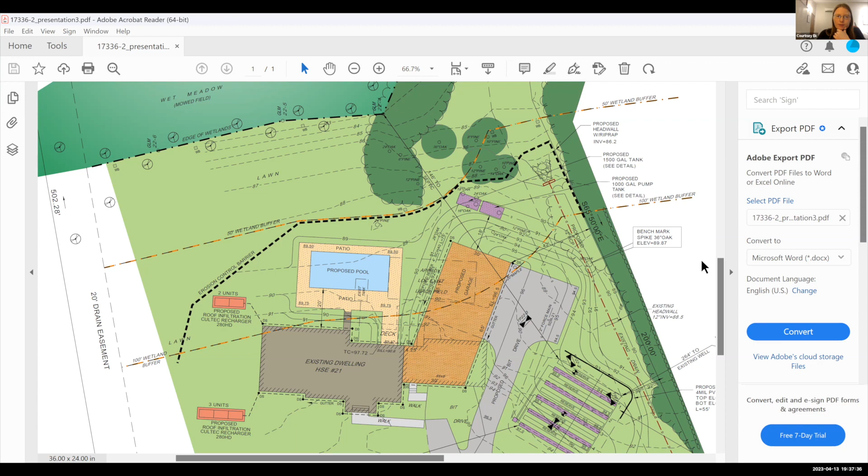And they can work out how to parcel that up. Can I ask one more question about that drainage easement area? So past the riprap, the easement continues into the 50-foot. Do you know if there's any kind of maintenance that needs to happen there, or do they need to prevent woody species from growing up, or does it not matter?

I think typically with an easement, the town would have the right to come in and clear enough so that it doesn't impede the flow. Okay, and that's why, like I was mentioning earlier, I'm a little leery about putting plantings there - right, get too large and impede the flow and have the town come in or somebody come in and cut them all down.

Oh, here, Sean must know that we're talking about him. Here, he's coming on now, so.

I just wasn't sure if we needed to make any accommodations for mowing in that area, but I think the town automatically has it.

Hey, Sean, can you hear us? You there, Sean? Yeah, that was quick. I just got here, sorry, I was trying to go to a fire, but then I didn't go.

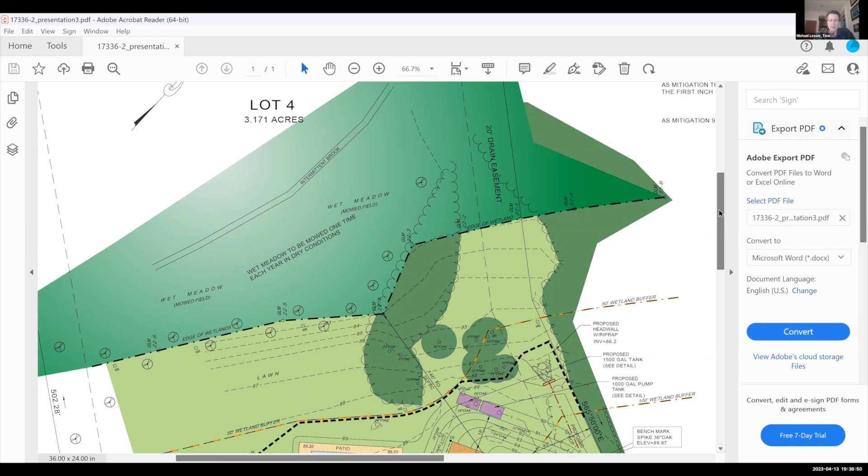We'll just fill you in. In the end, we're going to condition the project so that any construction work done on that drainage pipe, whether checking it out, repairing it, or adding to it, requires that before any work begins, there's agreement with you as to the plan of what to do. Then the next step would be that you can oversee any of the work on that. So it's sort of two parts. Does that seem to cover everything you need?

It does. And the as-built for the project will serve as my as-built for that pipe, as me and Rob had discussed, right? Yep. So we're basically done with that part of the project, with that kind of conditioning, and I think we've cleared up what's going to be managed and unmanaged in that area.

Going to the landscaping part on the other side, we're getting a nice mitigation by letting that wet meadow be mowed once around there, and it's demarcated by the trees, which I think is quite reasonable. I guess the circled things there are the new trees, but I can't tell how many there are.

2, 3, 4, 6... those are all new. 15 trees, I think, because we normally put the number. Yeah, 15 trees.

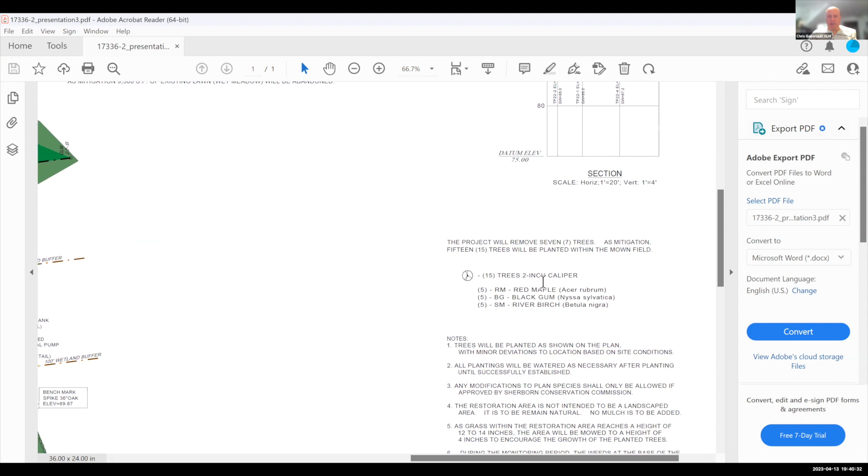Do we care about the trees that are further in? Oh, there's the planting schedule with the trees. Okay, what do people think about that choice? Anybody have any comment? It's fine, the choice is good.

Okay, good. Scroll back there. I'm just looking at the 3 trees sort of at the top, which I guess is what the applicant would prefer. I'm trying to think about the 3 trees on the right end too, whether they're right next to existing trees and whether they add very much, or whether they'd be better served somewhere else. I can't picture the place well enough to know whether those trees add something, since I see the existing tree canopy marked.

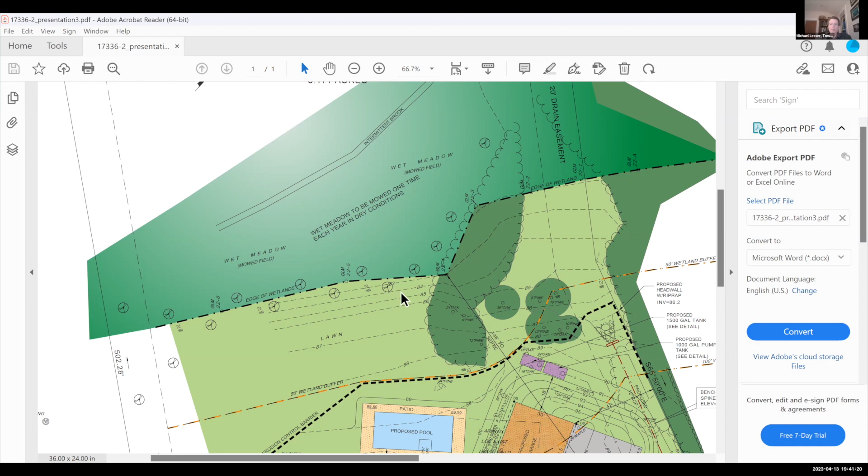I believe that existing canopy is shrubby rather than tree. Okay, I would just leave the trees as is. Okay, fine.

The mowing thing is - do we care about timing in the dry season? Do we care about the time of year, whether we worry about what birds and other wildlife go there?

Well, on our own conservation lands, we usually mow in October and November, so that you're basically brushing everything back without hurting the pollinators or anything like that. So November might be a good one.

I think that might be a little late in the dry season - whether we want to do it September 15th or October 1st. No, the point is to do it late in the season. Yeah, you want to be late, just trying to knock down the woody material.

But this is becoming harder and harder because the ground doesn't freeze very reliably. So do we want to ask for a November 1st or October 15th date, to give them flexibility as well as protect things? Do we need to specify a date, or can we just say late fall or winter, when the ground is frozen, so they don't damage the meadow?

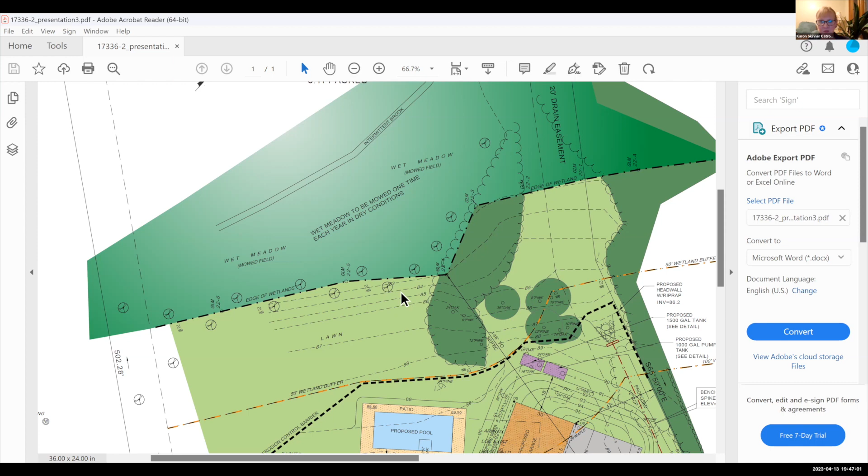Can you share the screen? I'll look at the app. Okay Chris, why don't you stop sharing, let me stop mine, and let me just bring up what I'm looking at in the application summary. Oh, I have that here, and I'm going to share that for everybody.

But I guess it shouldn't be a problem to sort of tell them not to manage along the boulders along the bank, except for invasives removal, if they want to do that. But are there boulders all the way along it, or is that just... I don't know, it looks a little different. Why don't we just say there's a 10-foot buffer?

Unless Chris would feel it would be a problematic thing to close our hearing and move forward with the idea of basically keeping a few feet off of the boulders, or a 10-foot border that's left to go natural except for invasives management.

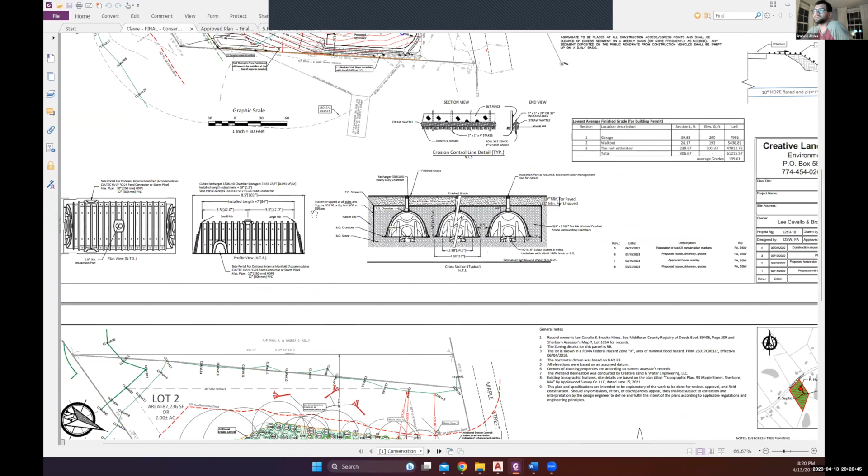And then we increased our impervious area by 28 square feet into the buffer. So on this next page here, we can see the overlap. The orange is the approved building envelope, and the purple is how we're proposing it right now. So the approved plan, we had that the disturbance in the buffer with impervious was going to be 660 square feet. That includes the house and the walkway and landing going up to the house.

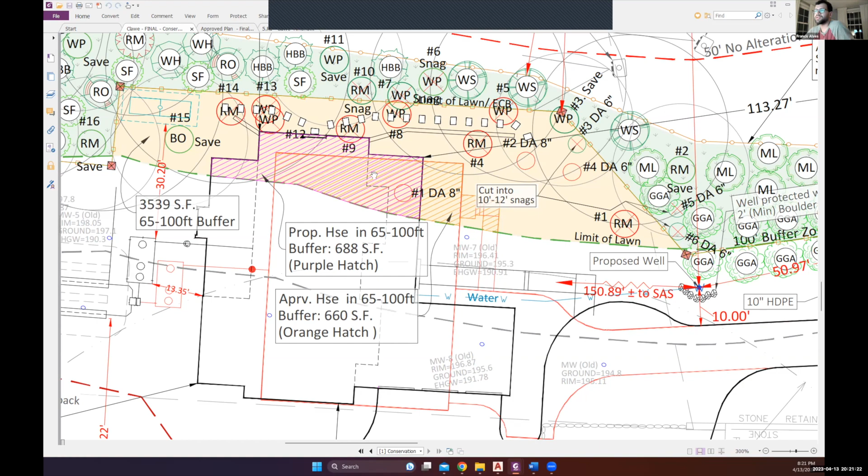And now with our current design, we have that our walkway is going to come towards the middle of the house. There's going to be no walkway here in the buffer, and it's going to be only house and then a walkout for the walkout basement. And we're going to put flagstones, field stones down, and create a path up to the backyard and up to the front yard.

And then we're proposing that this whole area, we're going to plant low maintenance, low growth vegetation such as ground cedar or ground pine, and put in a condition that that area is not going to be mowed.

And basically from the approved, that's it. In the buffer, we increased 28 square feet of impervious, and then added these flagstones to be able to walk up to the backyard and walk up to the front yard.

And then there's minor tweaks in the grading. We were able to move the driveway to this side. Our septic tank, we moved it slightly, we shifted it slightly over. The red is the approved. It got shifted a couple of feet back into the right.

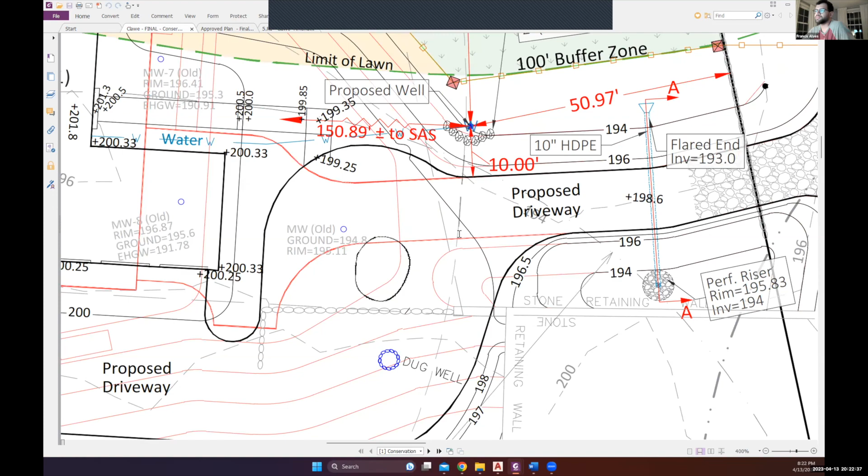This is how we had our original driveway coming in, this thick red line. And now this is the proposed driveway with a turnaround. So we flattened this area out from the original, since we're going to have to access the garage from the side, so we had to bring this grade out and rip rap this slope.

We're not doing any more cutting. Our monuments and our conservation markers are going to stay the same. We didn't change anything about our limit of lawn or disturbance. Our well continued in the same location. Our leaching field continued in the same location. The only thing that moves was the septic tank.

And in the impervious areas that we increased from the approved design, we did add extra recharge areas. So this wasn't the original design, but we increased this area here, we added an area here, and then we added another area on the back left. I think that's pretty much it, unless Lee has anything to add.

No, I think you covered it better than I ever could. So thank you. Right, Mike, I think that's it. If you have any questions, I'd be happy to answer them.

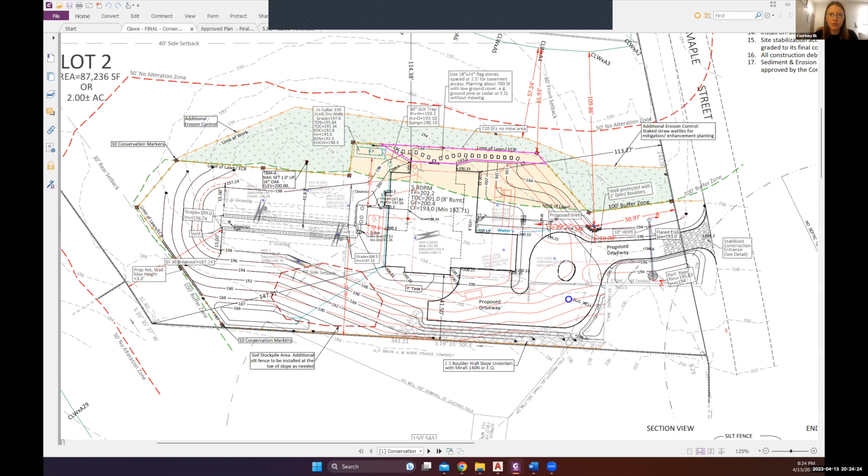So you said around the flagstone pathways is going to be like a low growing ground cover? Exactly. So around 720 square feet, we're going to plant ground pine or ground cedar, and not have it be a mowed area, so no lawn. So should that not say limit of lawn then? Yeah, the limit of lawn, that should change.

So it's not going to be limit of lawn. Limit of lawn is going to be here, and then over here above the recharge, the stormwater recharge gallery. So it's going to be parallel to this wing of the retaining wall, and then continuing straight from this wing here of the retaining wall. So lawn from here back, and this whole area is just the low ground cover. So this will have to be changed.

Is ground cedar a native plant? Yes. It's ground pine, I'm not very bright tonight.

The slopes that are up above the retaining wall, the 194 to the 200 in the front, how are you going to stabilize those? Here in the front, right in the tan area, within the 100-foot buffer zone, the contours 194, 196, 198, 200. How will that area be stabilized? Yeah, these are 3 to 1. So we're planning on just doing lawn, regular lawn.

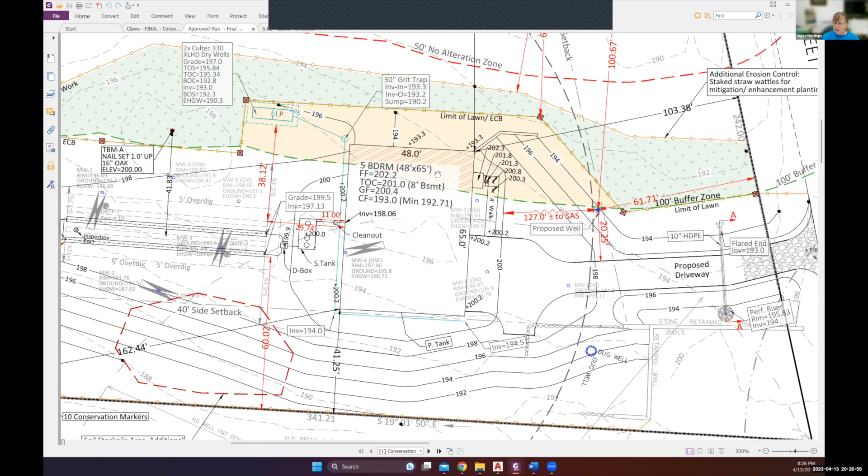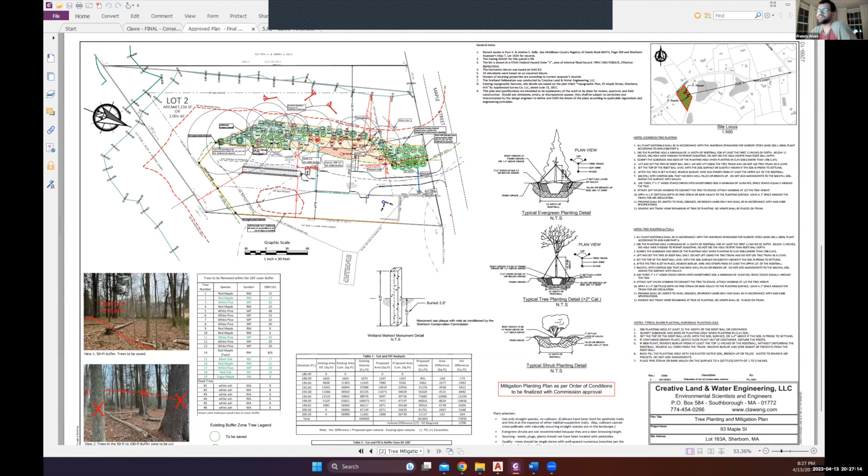I did put the original plan in the meeting folder. Yeah, this is the one that was approved from April 13th. The last change we had on this one at the time was the relocation of two conservation markers. So at the time we did have that, this was all going to be lawn.

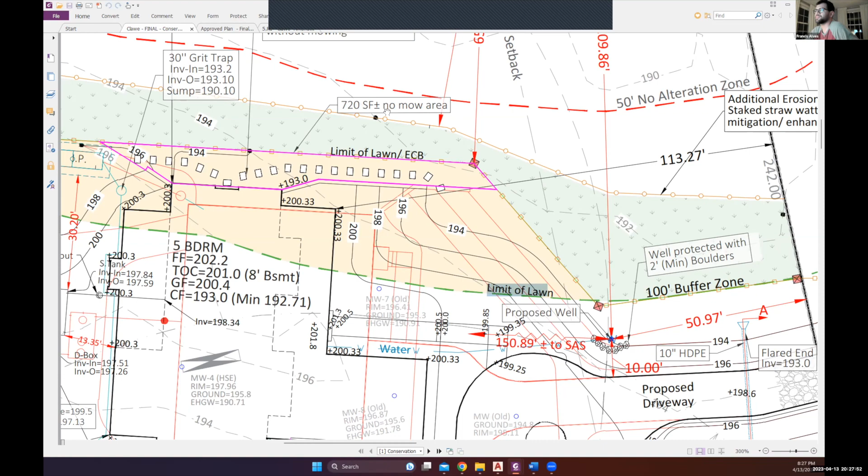The version I see in the meeting folder has another limit of lawn that's at the 100-foot line. Wait a minute. Yeah, that's this thing. Yes, it's that one. Yeah, this is probably just a typo from another place that I misplaced here. The limit of lawn should be here, with the erosion control barrier, and then a secondary erosion control barrier behind that.

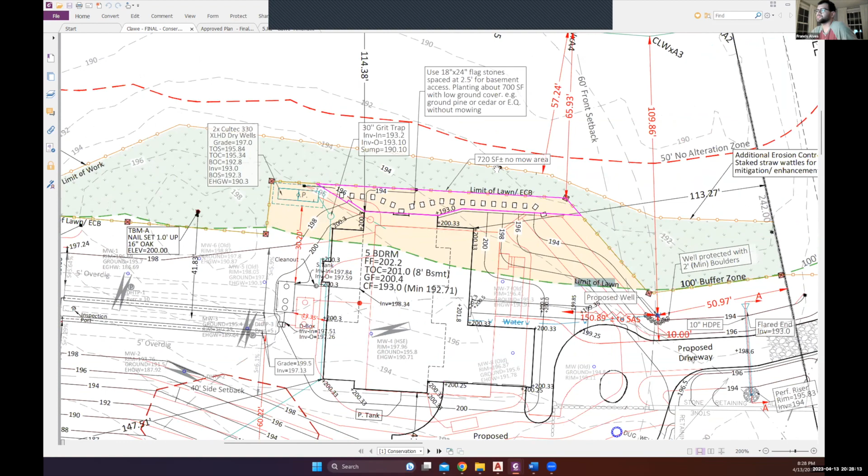There's going to be erosion control in between the markers. And then there's going to be an additional or supplementary erosion control that we're going to put up as we're doing the planting for the mitigation. And then here we have the mitigation in green, and then all this orange-yellow was going to be our lawn area.

So again, I apologize, the plan that you all approved with the order of conditions shows the limit of lawn at the 100-foot. I believe that's probably a typo because this was always going to be lawn for the maintenance of the structures and stuff. That's why we put our plantings over here, all outside of it.

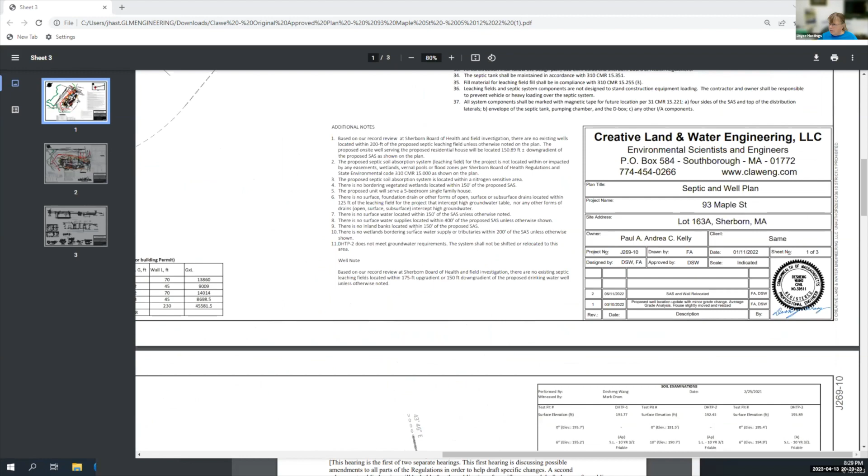Can you share your screen, Joyce, so I can see what plan? This was the last plan you circulated. Right here it says limit of lawn right at the 100. It has two limits of lawn. Yeah, it's got one at the 100 and then there's another one back, you're right. Yeah, on the erosion control barrier.

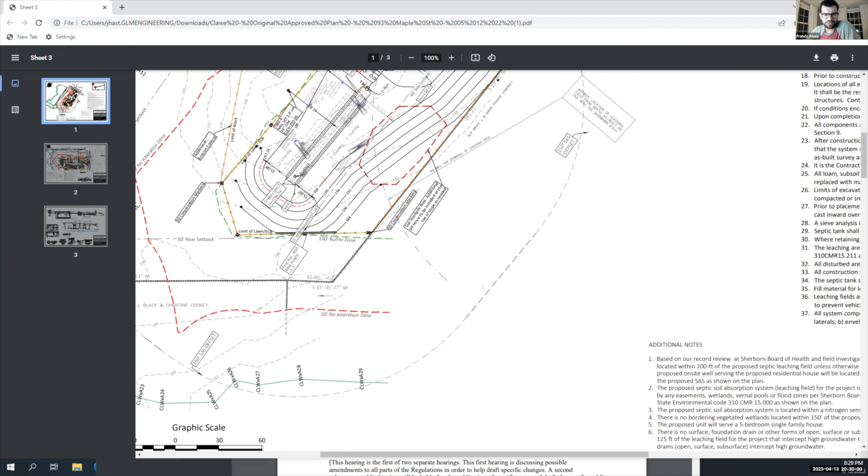So I was not part of the original approval, so I don't know what you all approved. What that plan seems to be is our proposed septic. I don't know what date that plan has or when it was dated. Wouldn't that be the same? No, because we got approval before, I think, for conservation.

I'm sure I asked this before, but I'm going to ask again. Is there a reason that you couldn't add that square footage on the other side of the house, or move the house more out of the 100? Because you're asking for another, what, 28 square feet, and there's already part of the house in the buffer.

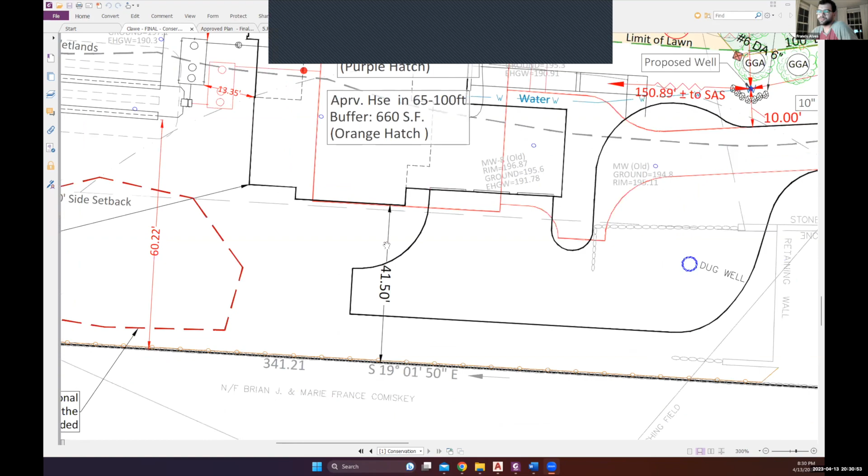Let me share my screen. Right at the setback line. Yeah, they can't go any closer. Yeah, so here we're right at the setback, and the setback is measured from the eave of the house, so we're at 41.5 feet. So we're already pushing it here from the setback.

One thing, Joyce, maybe you can advise on this. We've had this situation before where ZBA says you have to honor the setback, but then there's the expectation that you don't have to comply with the wetland setbacks. Is there any state law that says the setbacks from the property line are more important to enforce, or legally must be enforced, whereas the wetland setbacks don't have to be?

I wasn't really part of that, but I know you went through a lot of work to get this approved the first time. At my review, you managed to keep them out of the 50 entirely and minimize their activity within the 100, so they are adhering to your regulation.

So I hear your concern, they're not extending into the 50, I guess is what I'm trying to say. Yeah, but I think the issue here was that it was a completely undisturbed buffer, not similar to most of our applicants where the buffer has already been substantially disturbed. Again, I know you went through a lot of work to approve this.

I think part of what was discussed for the original was that's why we have so much enhancement plantings, because if you go to that site right now, there's mostly pines, and you can see we're significantly enhancing that whole planting area, which I believe was the whole point of contention - how much plantings were going to be done.

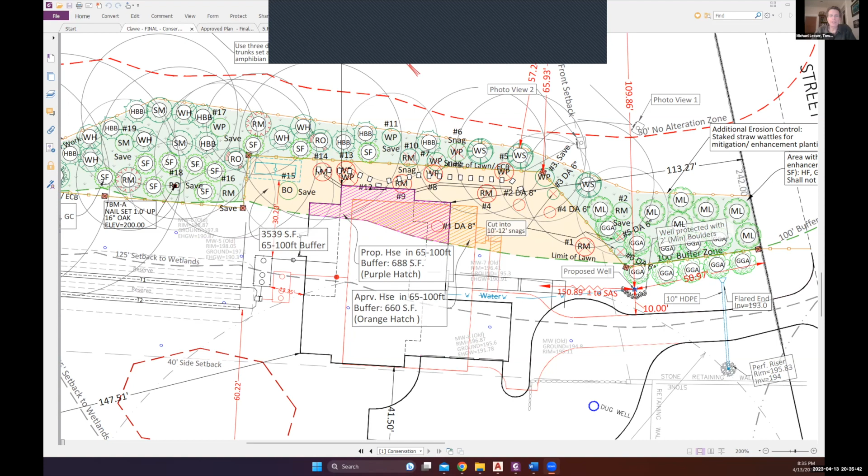So for the 28 square feet, they're giving up what was originally going to be 720 square feet of lawn - is that what I see here? Yes, maybe it's less because there's a path there. Whether you took out the path from that area, even if that was whatever - for that 50, path, we tried to minimize the impact as much as possible and not put a paver path, so we could try to maximize that pervious area.

Even between pavers - but even if the pavers are there, it's still a significant multiplier there. So I feel like, if anything, this could be an improvement from a wetlands perspective. What do other people think? I agree, I agree.

Matt, Carol - as long as that's native ground cover, I don't mind, and it's dense enough, I guess basically. Or whether, is there going to be anything in between? I guess these low cedars do spread out. I guess the question is, until they flesh out, is there going to be some sort of what will be on the ground? I assume there's going to be - I don't know what size stock is going to be put in there. Is that something you specify anywhere?

Well, the ground cedar is usually plugs that we would put in. The ground cedar? Yeah, oh, I guess maybe I'm thinking of some other plant. So what density of plugs are you going to do, and what's it going to look like until it fleshes out? How are you going to stabilize the earth there while everything is filling in, I think is the question. Okay, got it. Thank you, Joyce.

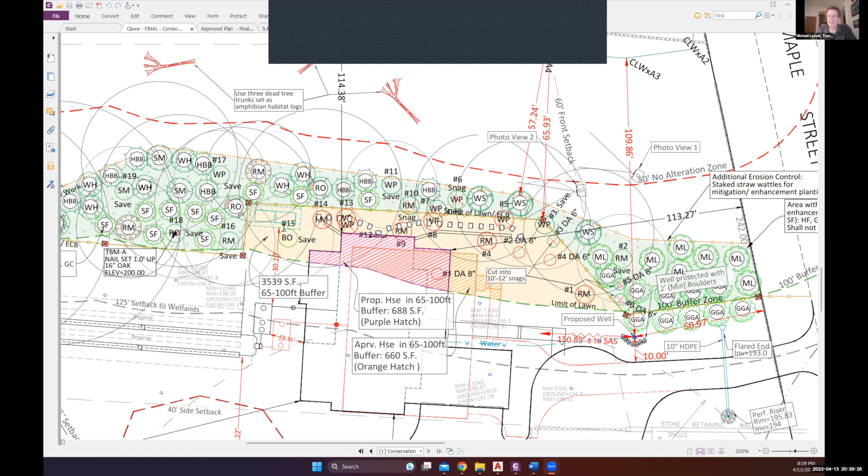Okay, and how many, and what's the density? Normally we get very specific about these things. What's the plan like in terms of density, so we get some good coverage? Is there any specificity that we could put there, or do we have to look that up online too?

Probably have to look that up online, so I don't know what nursery recommendations are for the best survival rate for these cedar plugs. Is that something the agent can agree to on our behalf? Why don't I work with Francis and Deshang before we issue the order and come up with some kind of language? Okay good, that works, I like that answer.

And we'll come up with appropriate density, and we'll have the leaf compost, as I guess we now know it is. And we're gonna make sure to remove those typos from the plan, so we're clear on that, and you'll change the limit of work. Yeah, the limit of lawn has to be moved in a few places.

What do other people think? Are all people okay with this as a minor amendment? Yes. Carol? Yeah, I mean, in general, do I think this overall is a net improvement for the wetlands? No, but it seems like this is the best we can do. When you say overall, meaning the whole project, not just these changes? Yeah, the whole project. I mean, an undisturbed area obviously is much better.

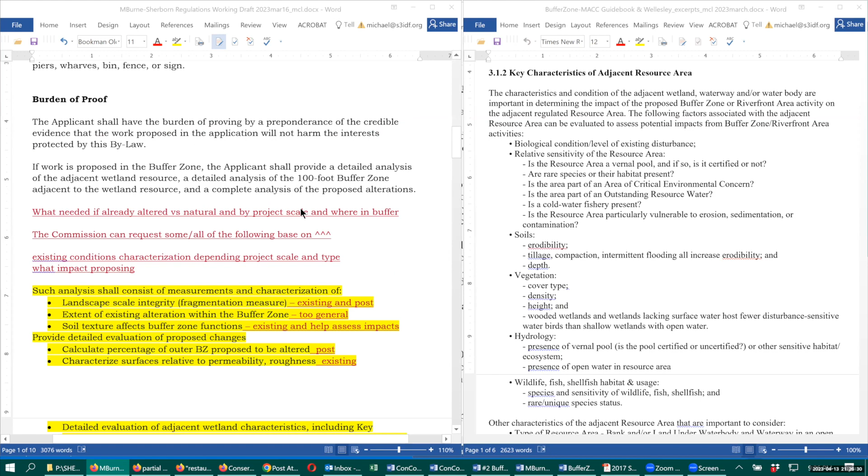So just start with goals with respect to adjacent upland resource, just so I know that I'm in the right document. Okay, thank you. So it just has my comments, but it's been in the folder for a long time. I know that one has been there, but I was looking at your comments. So coming down to trying to get down to some nitty gritty - I guess I'm going to skip over this.

I just want to go to his draft, even though we have to come back to it. He has a preamble here. That is great, I think.

I just want to bat around the idea of where we're thinking, and maybe we don't have to have an absolute decision made tonight, because our goal is to come up with a draft of changes that we would then circulate and start a new hearing where we invite other people. I don't see the new draft as having to be definitive on every point if we don't have a consensus, for example, or that we recognize it's a contentious issue. For example, we could have different ways. I don't mind having a draft that goes to the next hearing that says issue to be refined during the next hearing.

And this whole issue of what do we do, the last sentence on this page, and what people think. That we won't have permanent structures within 100 feet, in the case of new lots created after a certain date, which is the way Lincoln has done it or some others. Whether we need to add that it's also if the area is unaltered, or even if it's an altered buffer zone, we want them to restore it as part of some bargaining. What do people think about, for new lots, this kind of extended no-alteration zone?